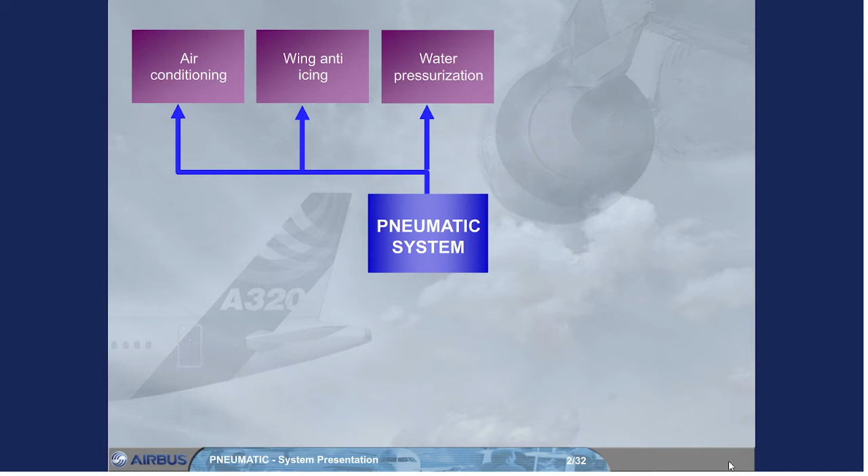The A320 pneumatic system supplies high-pressure hot air for air conditioning, wing anti-icing, water pressurization, hydraulic reservoir pressurization, engine starting, and, if installed, the aft cargo heating.

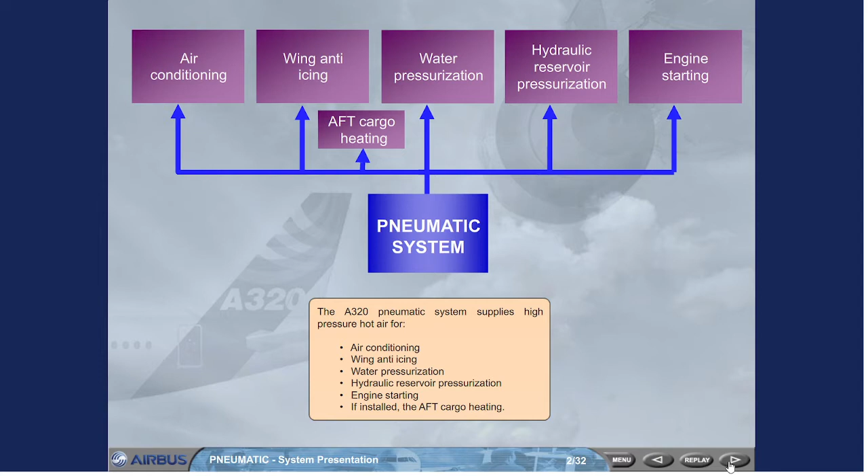High-pressure hot air can be supplied from three sources: the engine bleed system, the APU, or an external high-pressure ground power unit. Note: wing anti-icing is not permitted when the pneumatic system is supplied by the APU bleed.

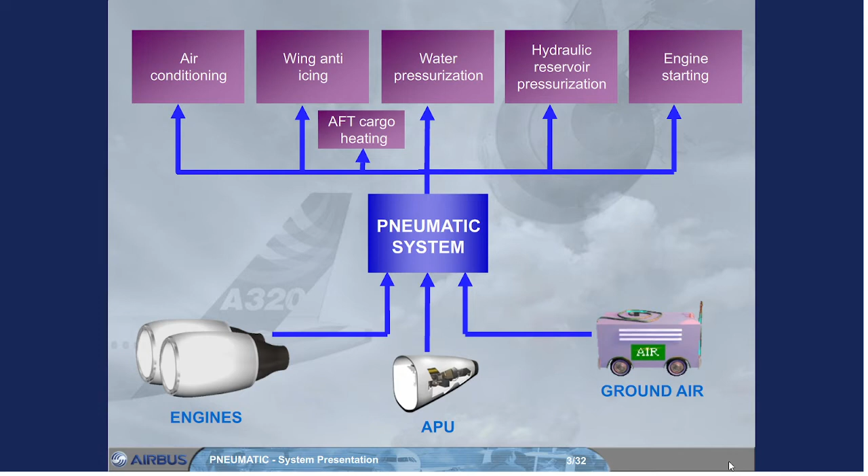The pneumatic system is controlled and monitored by two bleed monitoring computers, BMC. There is one BMC for each engine bleed system. Both BMCs are interconnected, and if one fails, the other takes over most of its functions.

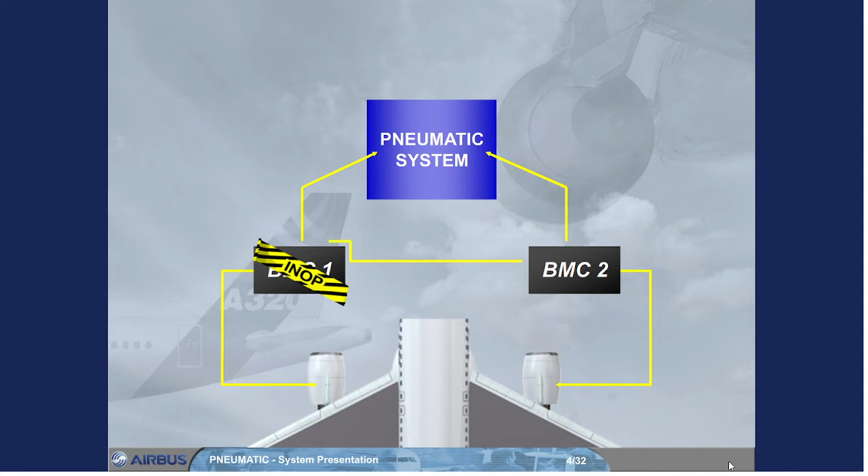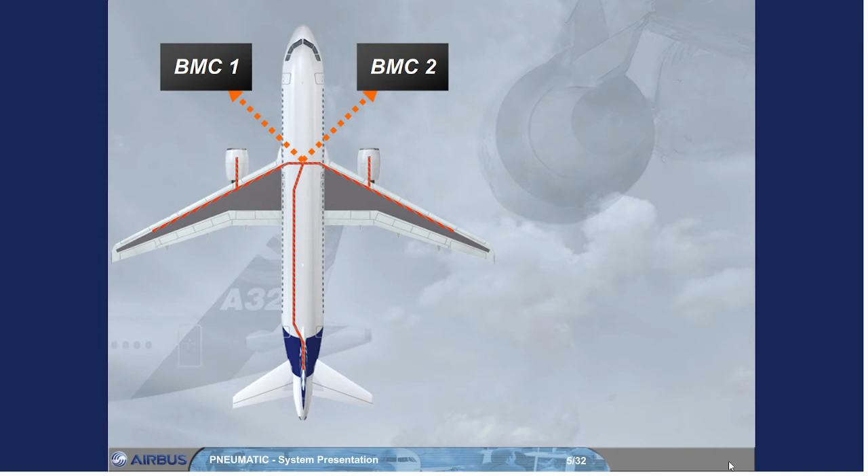An ambient overheat in the vicinity of the hot air ducts, in the fuselage, wings, and pylons will be detected by air leakage detection loops. If a leak is detected, a signal is sent to the BMCs, which automatically isolate the affected area.

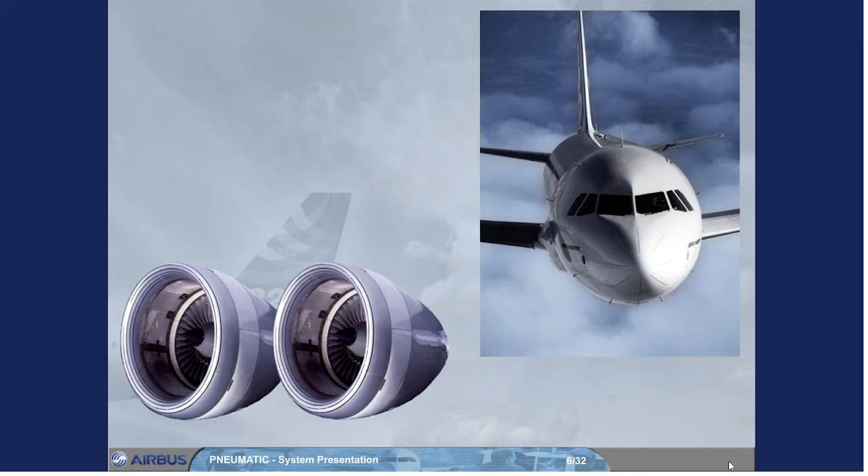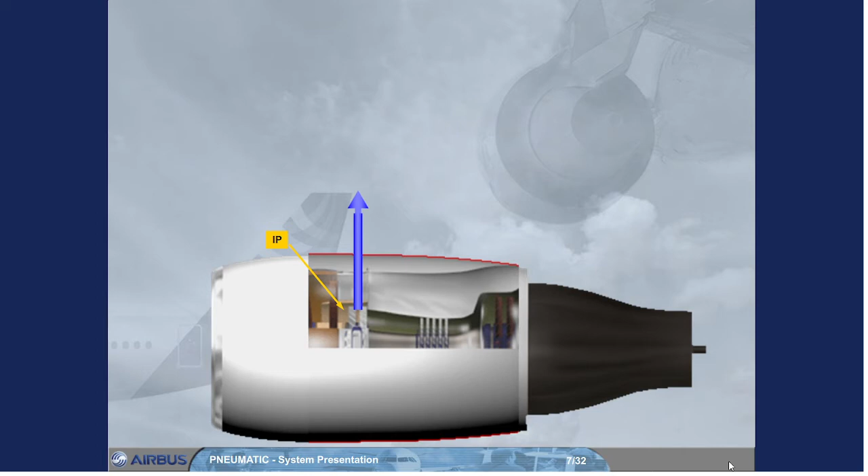In flight, the primary source for high-pressure air is the engines. Both engines have similar bleed systems. Air is bled from two compressor stages of the engine, the intermediate pressure IP port and the high pressure HP port.

There's an HP valve, which can cut off bleed air from the HP port. It is automatically controlled by the system and will limit the downstream pressure. Note: there is a non-return valve at the IP to protect the compressor against a reverse flow from the HP.

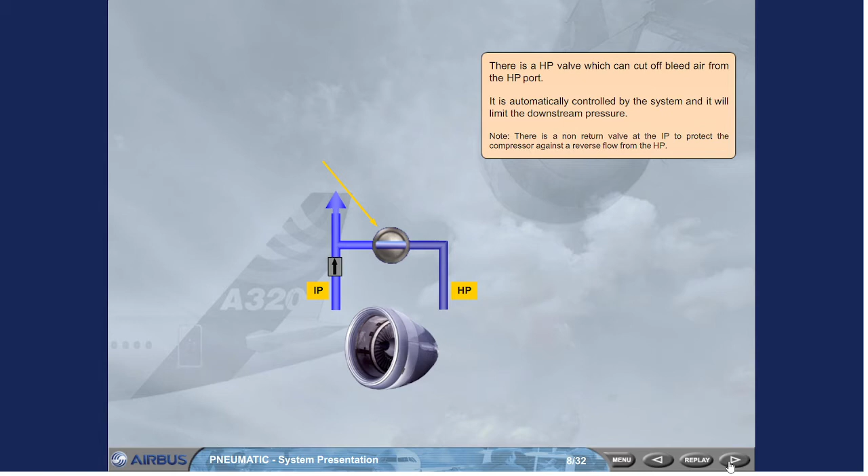The high-pressure section, HP, is only used when there is insufficient pressure from the intermediate pressure output, IP, due to a low engine compressor speed. Once the engine compressor speed is high enough, the IP is sufficient and the HP valve closes.

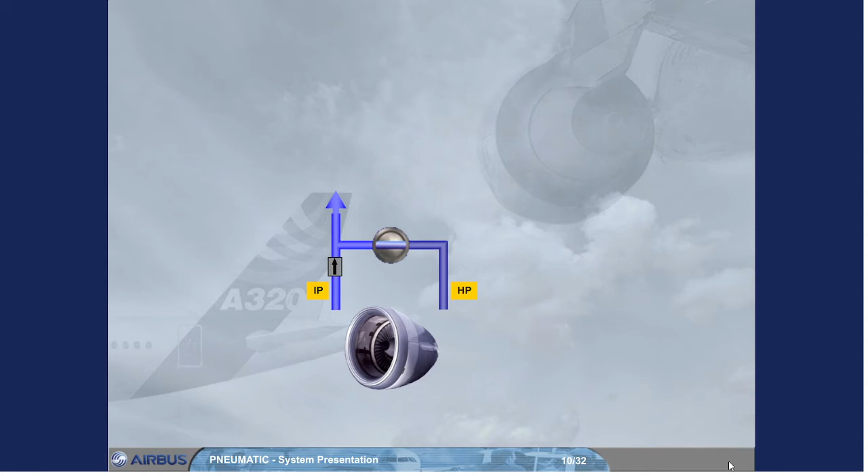The air extracted from the compressor then goes to a bleed valve, which acts as a shutoff and pressure regulating valve.

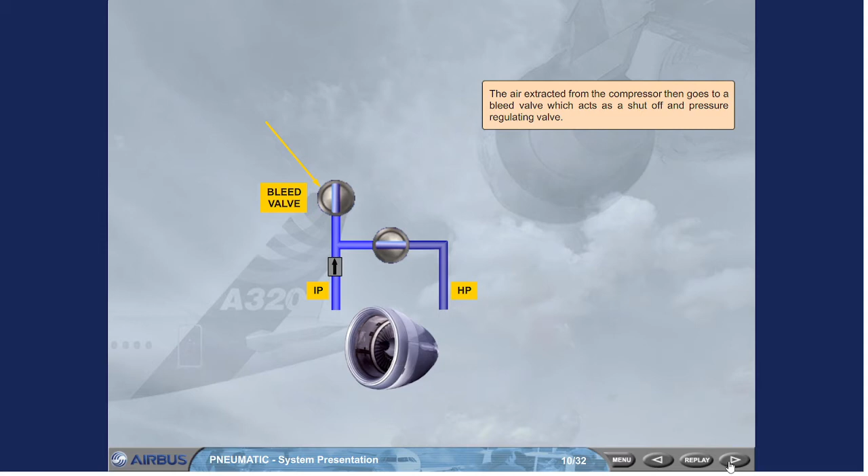Since the temperature of the bleed air is high, it passes through a precooler before being distributed to the users. The precooler heat exchanger uses cooling air, bled from the engine fan, to regulate the temperature according to the demand. Note: an overpressure valve, OPV, will automatically close in case of a pressure regulation problem.

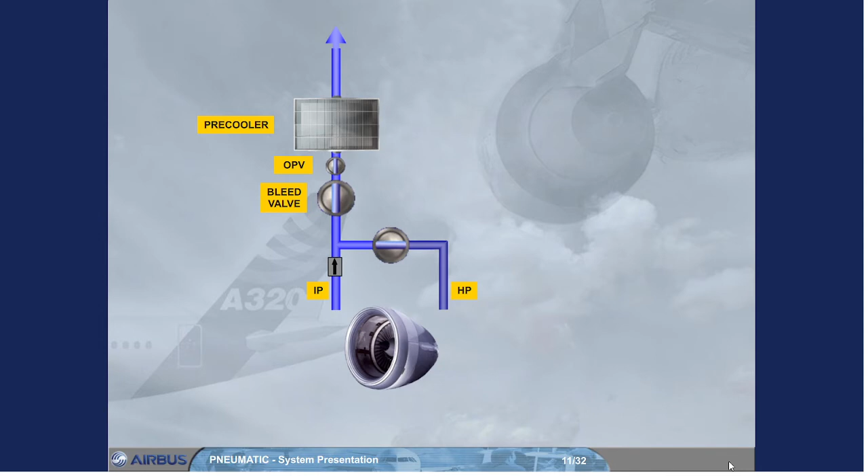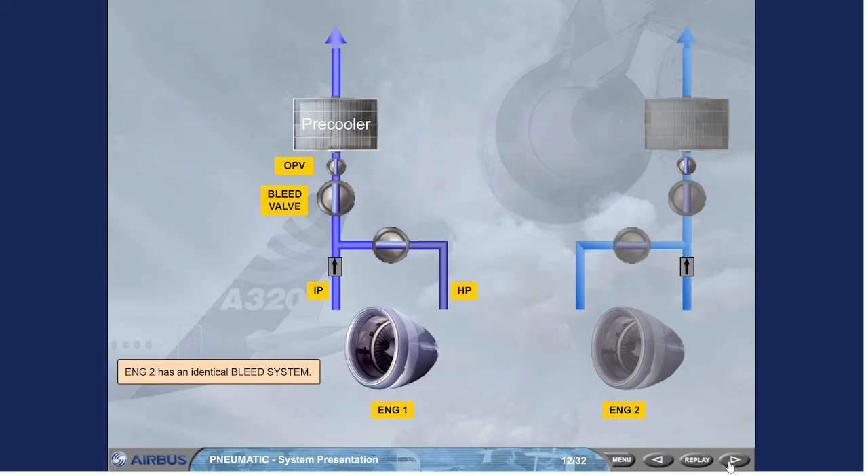Engine 2 has an identical bleed system. Both systems are connected by a cross-bleed duct. A cross-bleed valve permits their interconnection or isolation.

The APU can also be used for bleed air supply. This is usually done on ground for air conditioning and for engine start. However, APU bleed air is also available in flight.

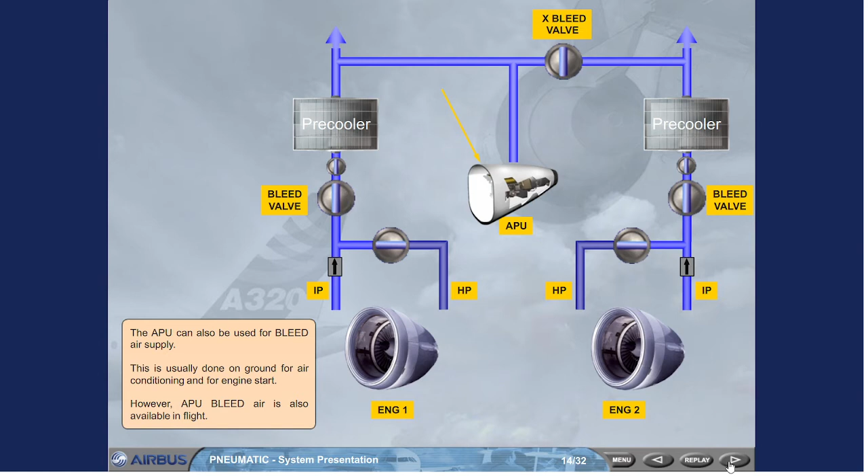APU bleed air is controlled by the APU bleed valve, which operates as a shutoff valve. Note: a non-return valve protects the APU compressor against a reverse flow from another supply source.

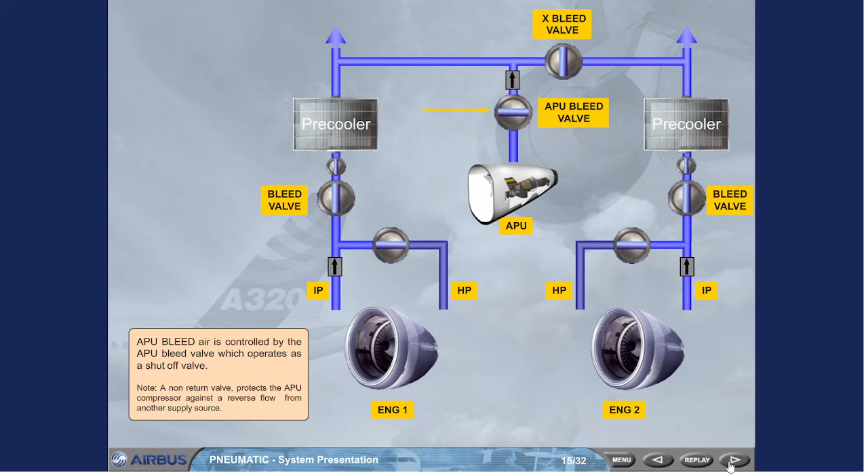Should the APU not be available, a high-pressure ground air unit can be connected. This completes the pneumatic system. We will now show you how system information is displayed to the pilots.

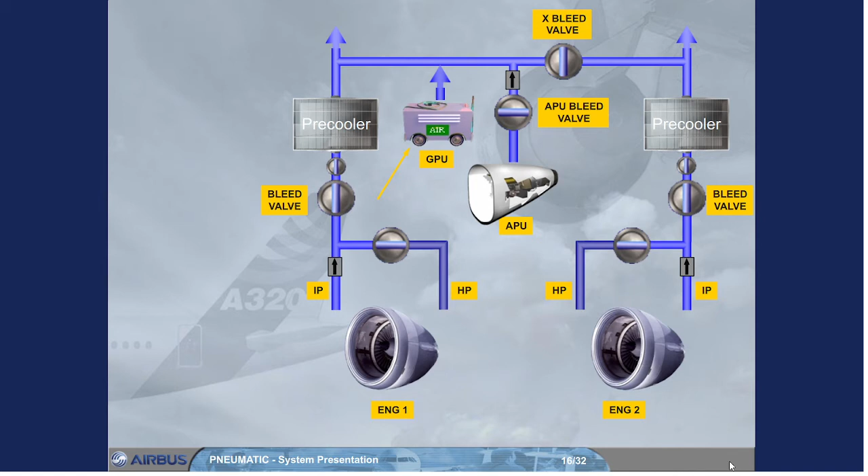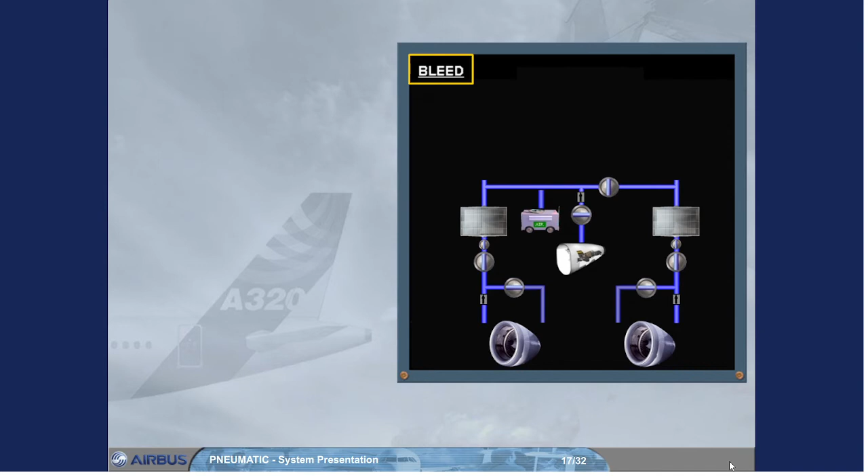Information on the pneumatic system is displayed on the lower part of the ECAM bleed page. Note: we have shaded the upper part of the ECAM bleed page because it is related to the air conditioning chapter. This will be covered in a later module.

Let's identify the system components on the ECAM page now: the IP and HP ports, the HP valves, the engine bleed valves, the precoolers, the APU bleed valve (only when APU is running),

the cross bleed valve, and the high-pressure ground indication, always displayed on ground even if the ground unit is not connected.

The following information is also displayed: precooler inlet air pressure, precooler outlet air temperature, and engine identification numbers.

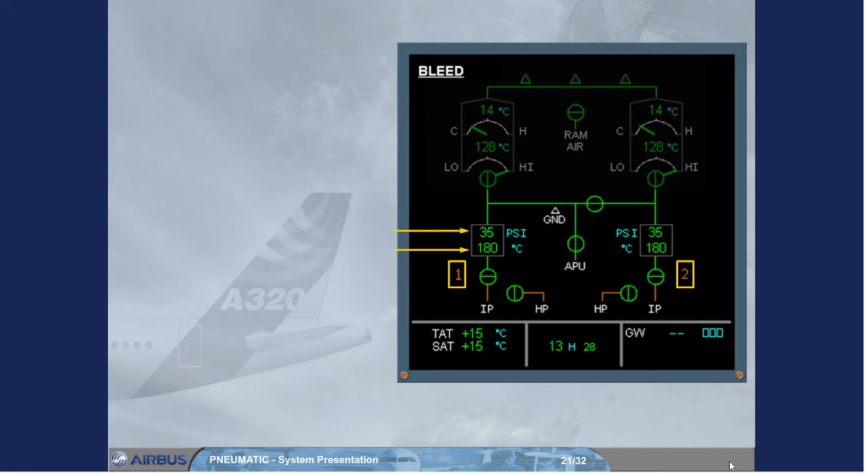Controls for the pneumatic system are part of the air conditioning panel, located on the overhead panel. Again, we have shaded the controls which belong to the air conditioning chapter.

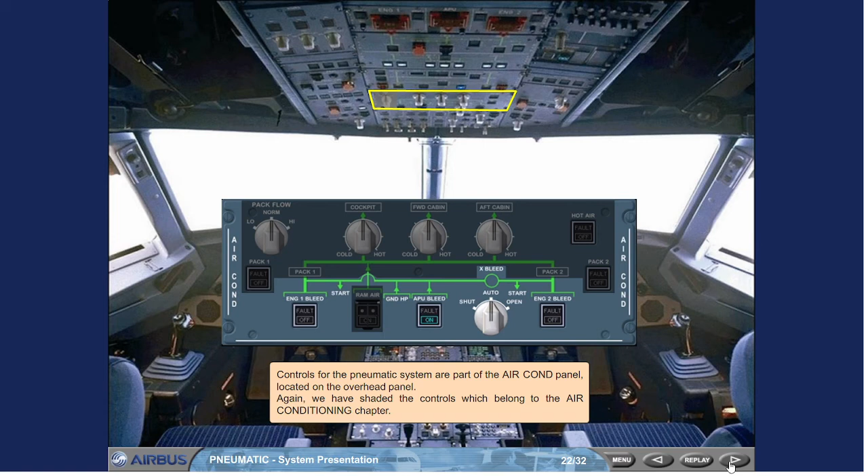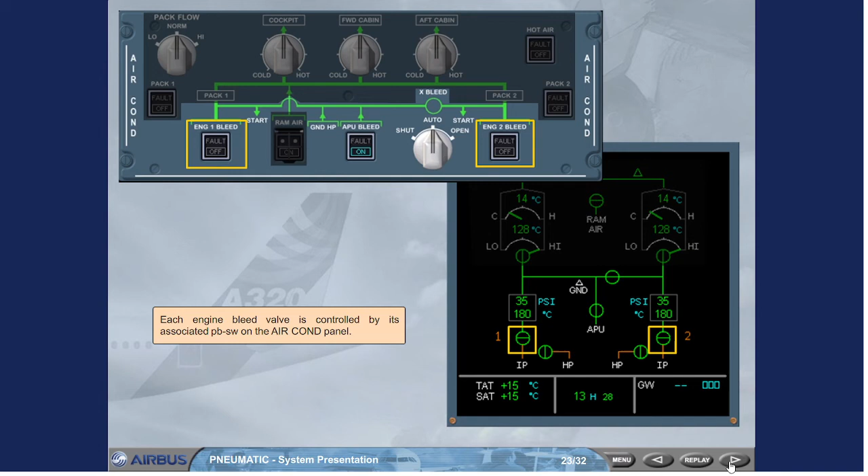Each engine bleed valve is controlled by its associated push-button switch on the air conditioning panel. The APU bleed valve is controlled by its related push-button switch.

The cross-bleed selector switch enables the pilot to open and close the cross-bleed valve manually, or to let the system operate the cross-bleed valve automatically.

Usually, the APU bleed air is used to start the engines. The APU is connected to the bleed system. You are ready for engine start.

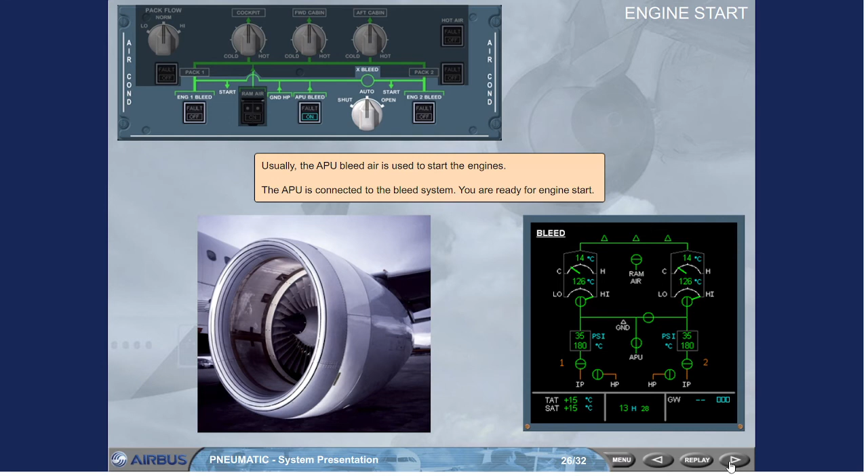Notice that the engine identification numbers have turned white, indicating that the engines are running. The engine bleed valves remain closed because the APU bleed valve is open, and the APU has priority over the engine bleed. We can now switch the APU off.

Observe the ECAM. The APU bleed valve is closed. The cross bleed valve is automatically closed, displayed amber during transit. The engine bleed valves and HP valves are displayed in line green because they have been automatically opened.

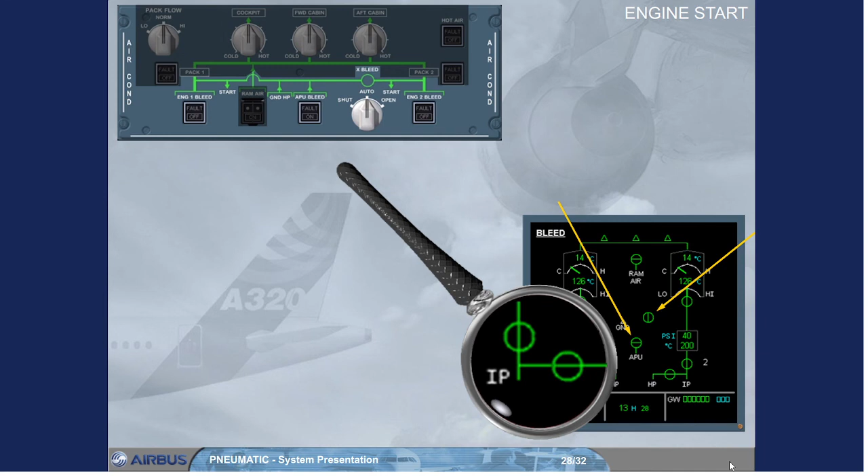We will now talk about the changes that occur in the pneumatic system during takeoff. Note, normally, the ECAM engine page is displayed for takeoff. For training purposes, we will display the ECAM bleed page.

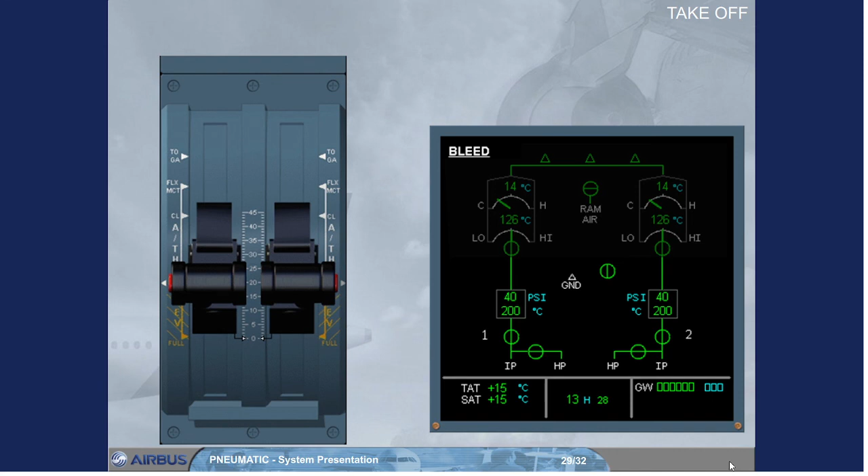As engine thrust is increased, the pressure delivered from the IP stages is sufficient, and the HP valves are automatically closed accordingly.

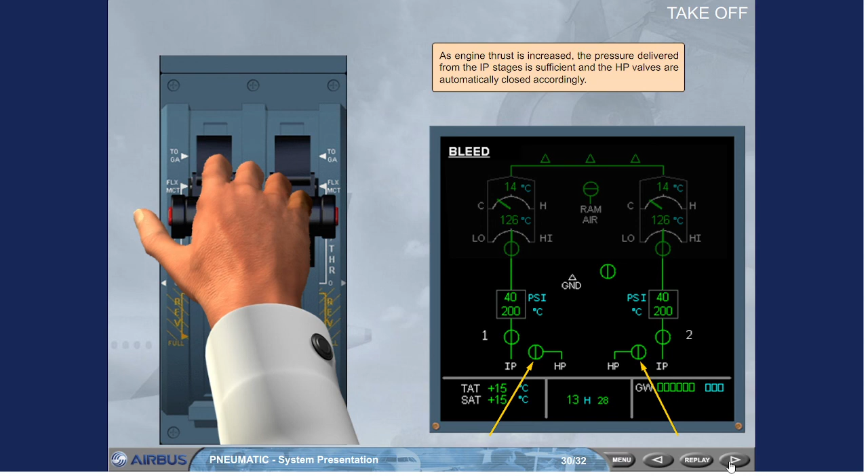If the APU is inoperative for bleed air supply, a ground HP air unit can be connected to provide pneumatic pressure for engine start. The ground unit's pressure and temperature are indicated on the ECAM.

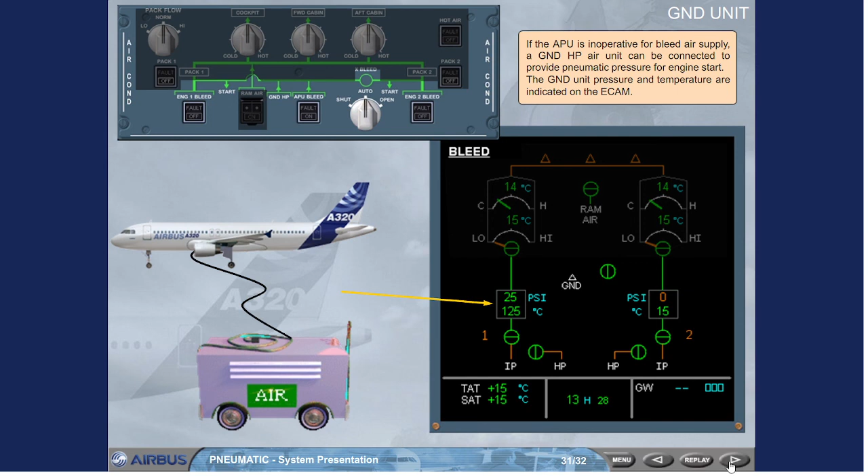Notice that, in this case, the cross-bleed valve remains closed with the cross-bleed selector switch in the auto position. In order to start engine 2 first, you have to manually set the cross-bleed selector switch to open. This is done according to a procedure in your FCOM PRO-SUP-70 section.